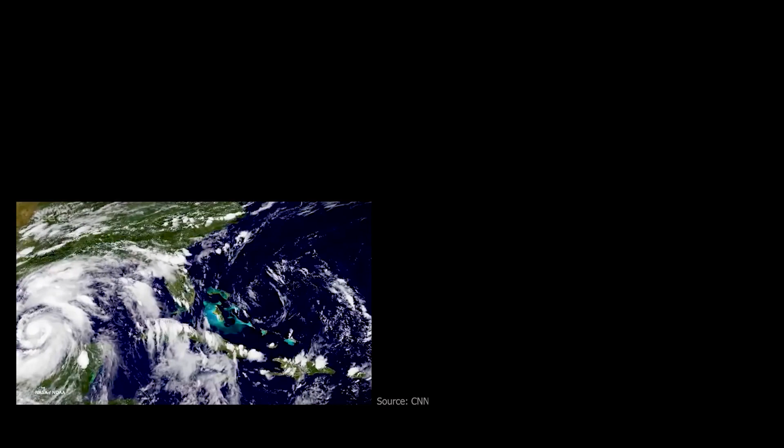Navotas has more than 200,000 residents, some of them living in danger zones. Glaciers are melting, sea levels are rising, droughts are more frequent, and extreme weather events more common.

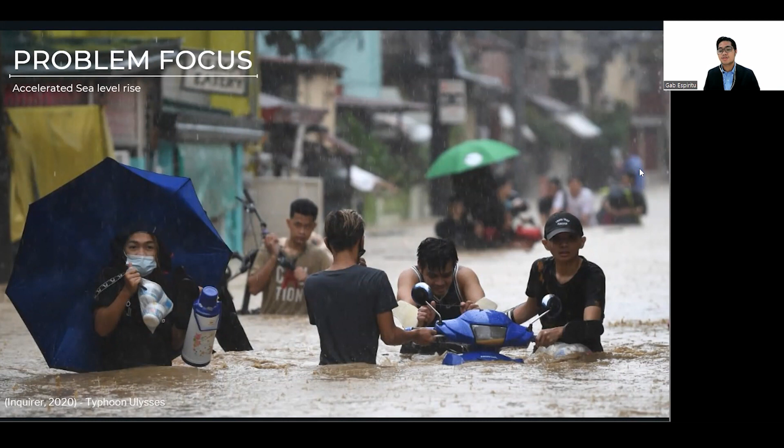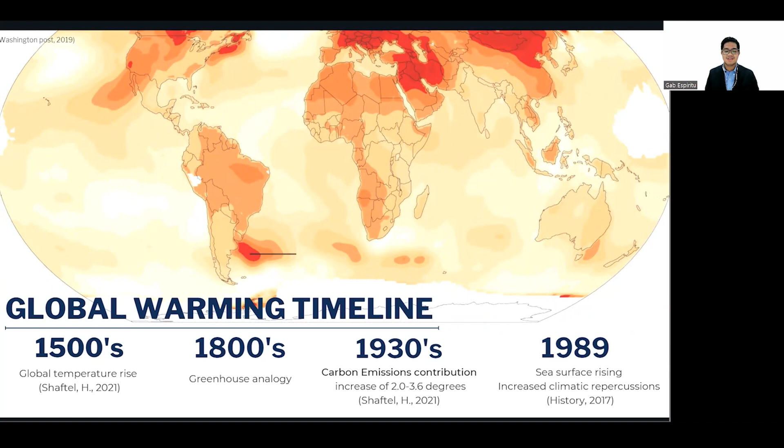Before I go into the details of the study, I want to briefly run through the background on how the current scenario of sea level rise came about. The underlying problem shows that the timeline of how global warming influenced sea level rise started way back in the year 1500s to 1989, shown in the projected emissions outlook explaining a 25 to 100 year temperature variation on a global scale.

High levels of salinity cause drastic changes to terrestrial and aquatic life. More specifically, in the Philippines alone, there's a higher percentage loss of topsoils, denuded watersheds, vulnerable croplands, and an average deforestation rate of 28%.

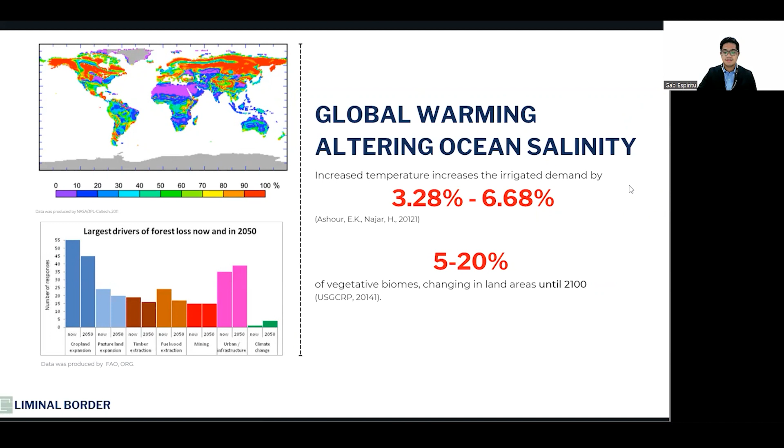Global sea level, based on RCP data analysis, where each RCP contains a unique set of socioeconomic assumptions that loops into natural systems responding to the overall warming of the global temperature. Based on the RCP scenarios presented, reflected in the graph is a factored socioeconomic representation that estimates the projection of sea level rise up until the year 2300.

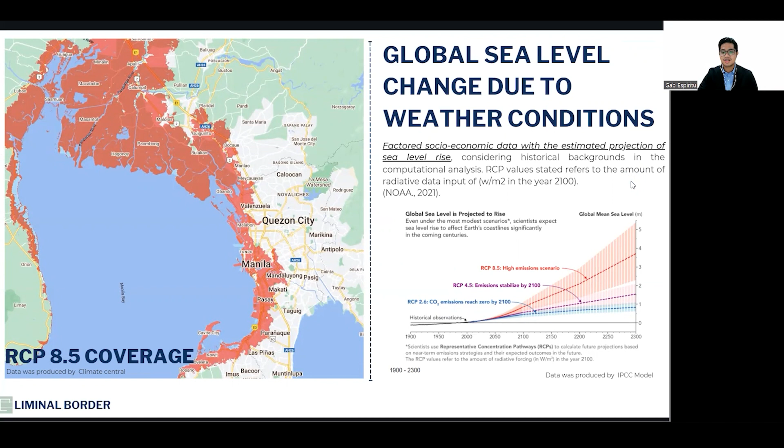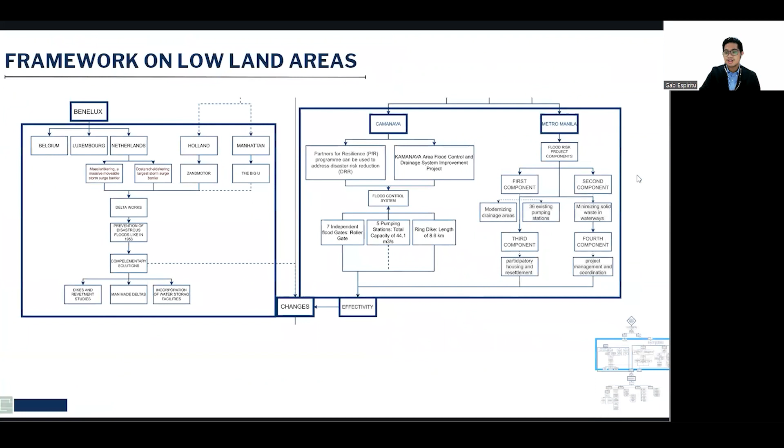The study framework of sea level rise now focuses on the global and local lowland areas. Both the global and local setting contains mitigation solutions to sea level rise. For the global scale, the study focuses more on the observation of low countries such as the Benelux, Manhattan, and Holland, which all contributed and prospered from the ongoing and developed Delta Works, setting as the main template for prevention.

As for the local setting, most of the lowland areas focus more on the logistical aspect of prevention and control systems. Indicated in the chart are some of the changes due to sea level rise in lowland areas, which heavily affected the economical, societal, environmental, and health factors.

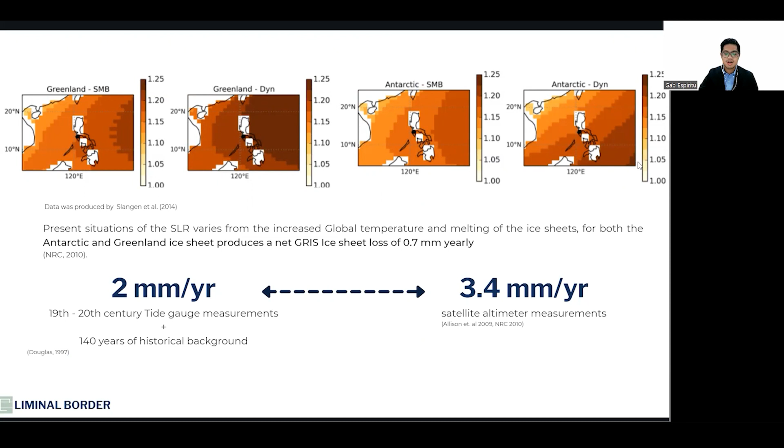Sea level change rates in an individual ocean basin deviate at an amount to the global mean, as it is affected by relative influences such as current movements, atmospheric circulation, the Earth's gravitational field, and the influences of rotation axis.

sea level rise within the area of Manila alone is rising 4 times faster than the global average rate. Considering that the Philippines is one of the most disaster-prone countries in the world that experiences flooding due to more than 20 typhoons a year, the acceleration of sea level rise will place densely populated coastal cities underwater and nearby coastal areas, which further implicates an increase of land subsidence scenarios and soil erosion issues.

With the statement of the problem, the study focuses more on the intensification of climatic influences towards the year 2050, resulting in a continuous acceleration of sea level rise, threatening lowland areas and resulting in high-risk zones. The study also tackles the potential threats of ground subsidence and its relation to the allocation of buildable areas and developing zones within the scope of the study.

As for the research questions and objectives, the first question asks what projection studies can contribute to producing resilient strategies against episodic changes in sea level rise and the prolonged effects of global warming, with the objective of integrating an environmental analysis and probability scheme to delineate the focus points where increased climatic conditions will have huge impacts. Second, what outcomes can the development of water management studies contribute to high-risk zones and vulnerable areas?

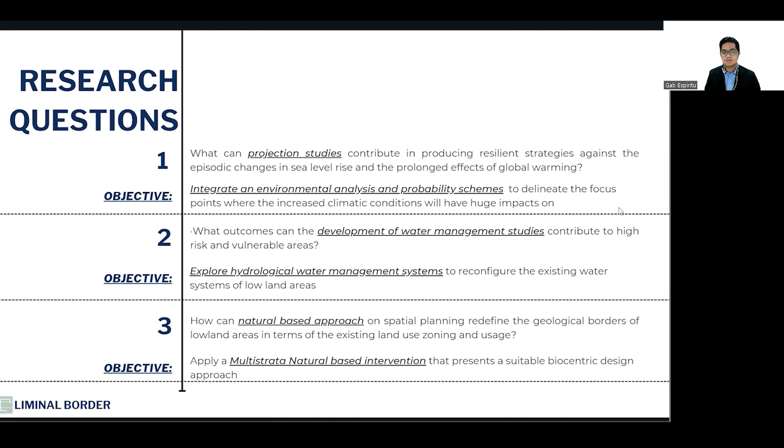Having the objective to explore hydrological water management systems to reconfigure the existing water systems of lowland areas. Lastly, how can a natural-based approach on spatial planning redefine the geological borders of lowland areas in terms of existing land use zoning and usage, with the objective of applying a multi-strata natural-based intervention that presents a suitable biocentric design approach. As for the research goal, it covers achieving an adaptive context of spatial programming that promotes resiliency in programming, increases public accessibility, creates a forefront of tourism magnet, re-engages the ecosystem outlook, and builds a communal space.

To connect the liminal understanding of the problem and the time-based design intervention, let's delve into the application of the liminal theory and its complementing design analogies. According to Patrick Troy Zimmerman, liminality is a transitional threshold between two fixed states in a cultural rite of passage for dissimilar spaces in the architecture paradigm.

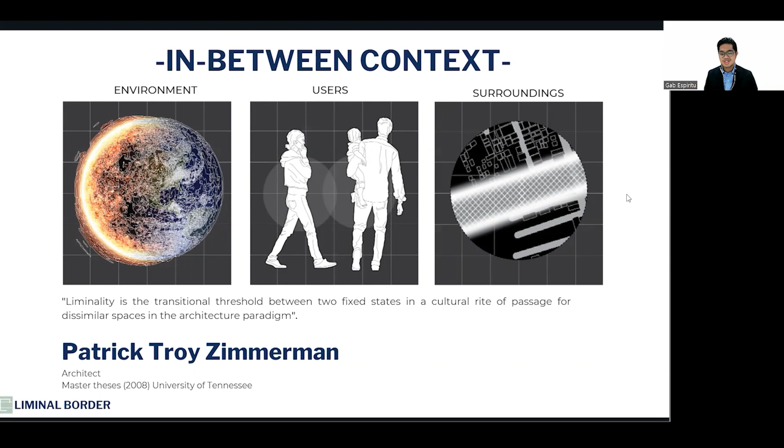In simplest terms, the theory of liminality can be understood as the in-between context. It can be situated in an environmental setting, user-face setting, or within the surroundings of the built environment. The liminal approach challenges current norms and situates the in-between context of it, which relates to several influences of time as a linear pathway. This involves the prolonging and worsening status of sea level rise, mainly due to increased global warming scenarios. Now, how can this in-between context deviate from existing solution materials and tackle a new approach?

Liminality presents preliminal, liminal, and post-liminal phases, where each phase conducts a different modulation of activities. Under the preliminal phase, it is focused more on the idea of separation from what the current norm is. In simplest context, it is to start or instigate an act.

For the liminal state, it reconstitutes the act taken in the previous state, which creates a transitional medium going towards the post-liminal phase, where it showcases a consequential paradigm of the preliminal and liminal, acting as a foundational platform towards incorporation.

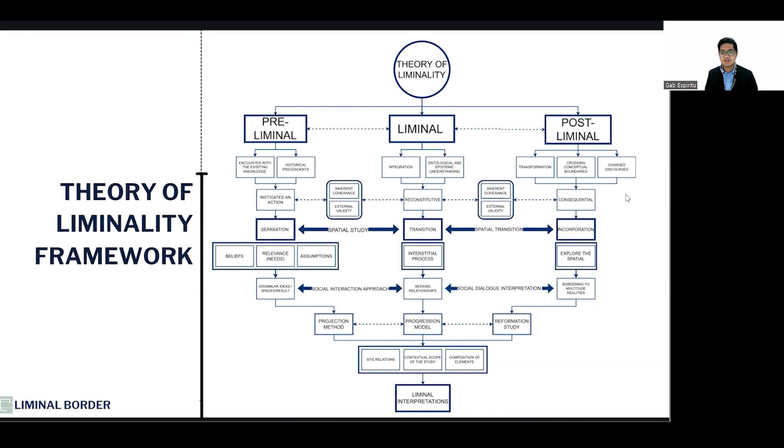This model covers the spatial and contextual aim of the study, where it redefines itself as projection, progression, and reformation. Tier liminality poses a speculative approach where it stimulates a user and observer differentiation. For the user threshold, it aligns with liminal expressions of spatial and contextual reasoning, while the observer threshold connects the biocentric approach towards the built environment as a new cognitive way of understanding.

To concretize the process of liminality, polyvalent adaptation situates a design analogy that is based on a time-based development, considering various implications and reasoning for adaptation that ultimately culminates with the focus of language, logistical, contextual, and program allocation.

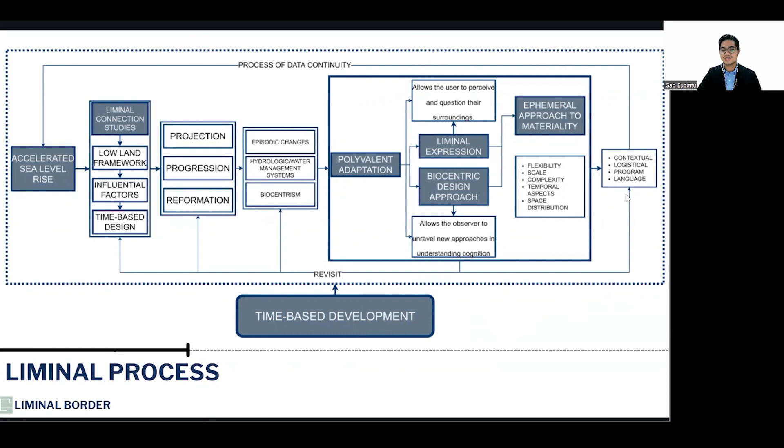The theoretical framework relays the scope of the study considerations regarding low-lying areas, which pans out to the theory of liminality of projection, progression, and reformation. Each threshold connects with the proposed liminal outcomes.

For the study of episodic sea level rise, it highlights projection aspects that are achieved through probability schemes and risk assessment methods, which consider percentage predictions and pathway scenarios.

Next, we have the macro and micro water hydrology process for progression, which focuses more on the process of containment and delivers the adaptation of existing systems to produce efficient collaboration between program and solution.

Lastly, the biocentrism ideation focuses more on the reformation idea that tackles agroforestry studies and natural-based solutions, which ultimately questions the meaning of the built environment and its purposes. The three outcomes end with the intent to create proper space programming analysis, a dynamic contextual outlook, and a multi-strata natural-based intervention. For the first part of the conceptual framework, it shows the formulation of the theory of liminality in accordance with the outcomes of preliminal, liminal, and post-liminal.

This correlates with the narrative of the lowland systemical and programmatic approach to sea level rise by interpreting the preliminal phase, liminal phase, and the post-liminal phase as a single and direct entity of the design process.

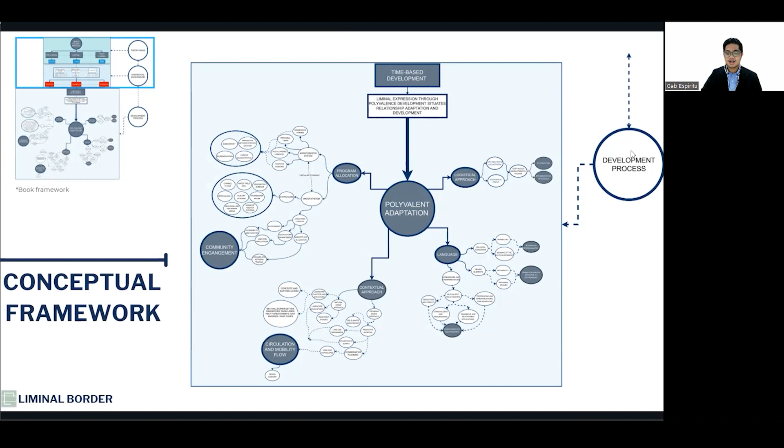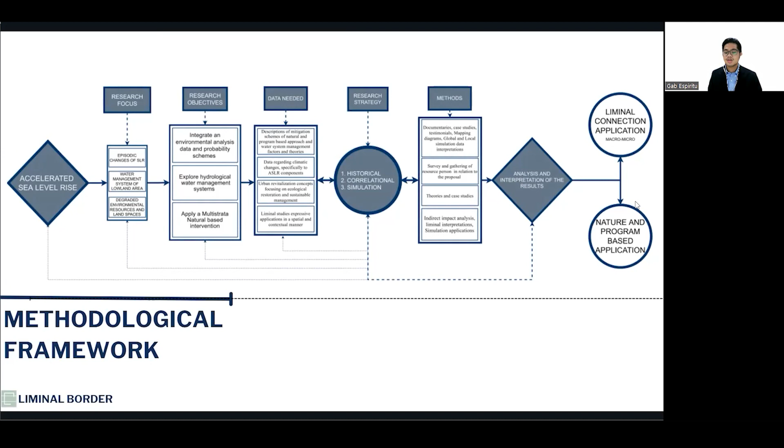For the methodological framework, it shows the process of data allocation going towards proper research strategies of historical, correlational, and simulation methods. It then follows the delivery methods, concluding with the analysis and interpretation for the architectural intervention.

For the case studies, first we have the New Meadowlands located at New Jersey, which focuses more on integrating a spine-like foundational system for transport and protection from future storm surges.

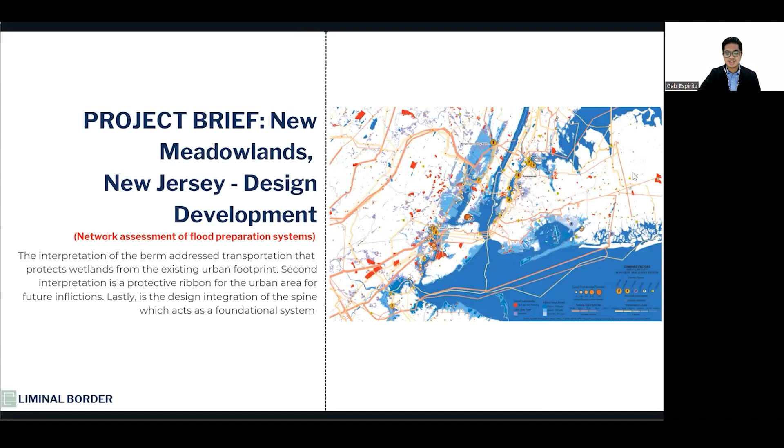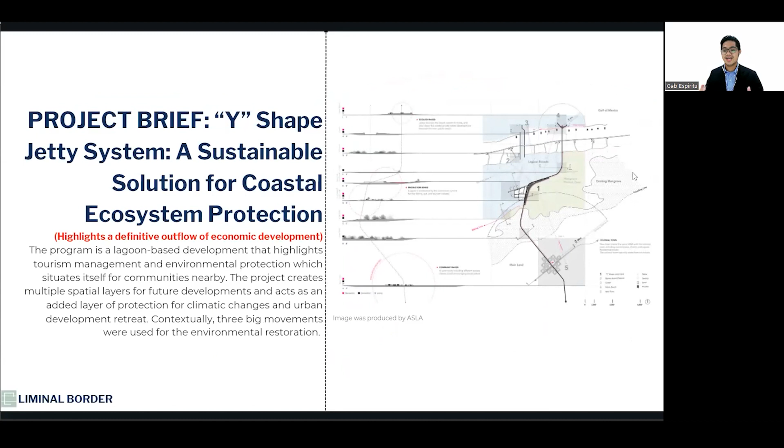The Y-shaped jetty system focuses on coastal ecosystem protection, where it creates multiple spatial layers for future climatic changes.

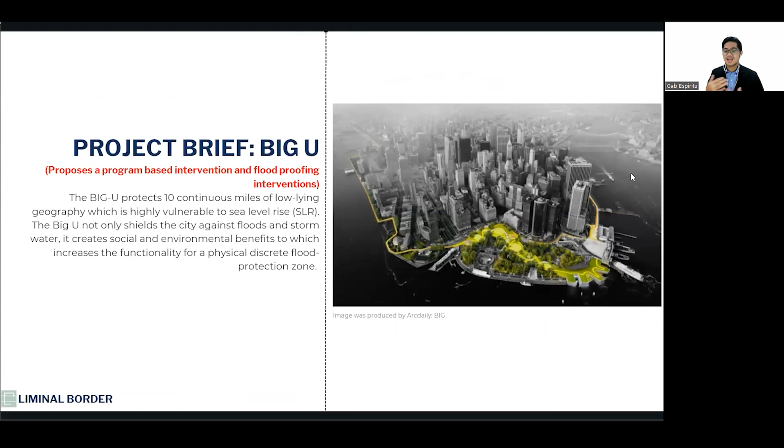Big U by Bjarke Ingels spans into different layers within the coastal area that protects the city from floods and storm water. LPPCHEA, a wetland center complex, focuses on preservation and conservation of mangroves, which also acts as a venue for an educational center.

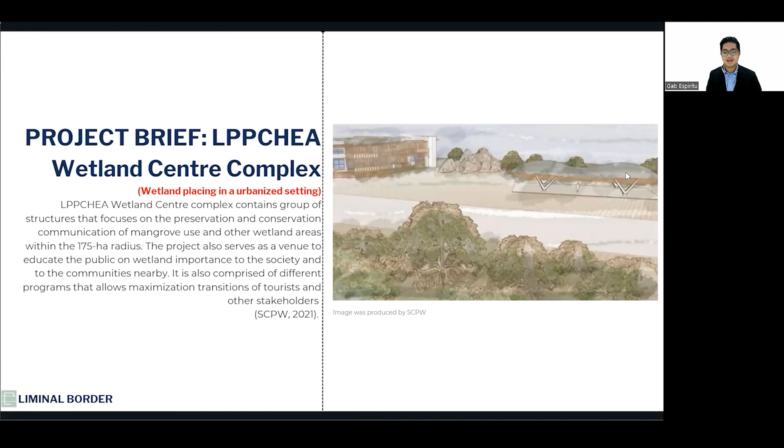Lastly, the amphibious boulevard pavilions react to an emergent type of habitation along the riverbank that blends itself into the surrounding environment.

For the dialectics, the thesis explains that sea level rise places lowland areas as a benchmark for liminal ideation in developing polyvalent adaptive scenarios for resiliency development.

For the antithesis, it poses that intensification of climate anomalies induces drastic change and will negate adaptation techniques.

For the synthesis, it entails a yearly projection of sea level rise that proactively uses a biocentric design approach of liminal expression through polyvalent adaptation techniques in lowland areas.

For the thesis statement, the climate-threatening outcomes of accelerated sea level rise posit that liminal expression as a design approach through polyvalent strategies of adaptation, covering a biocentric outlook of typological development, hydrological background study, and water management systems, results in a viable environment that generates a circular economic lifestyle.

For the scope of the study, it heavily focuses on climate outcomes up until the year 2050, before the worsening status of global warming and its effect on sea level rise. As for the limitation, most of the data projection and analysis is also limited only to the lowland borders of the CaMaNaVa area.

For the study proper, a major contributor to the fishing livelihood was the 23 fishing ports of the CaMaNaVa region, where it produced thousands of jobs and food security.

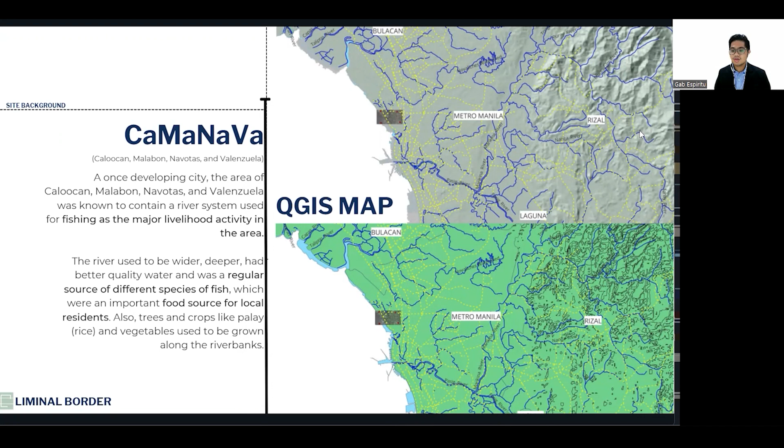This city is known to be a capital of market centers and other centennial parks located within the nodes of each region. The graphic is taken from QGIS, as 4 points were taken for georeferencing with a 50-meter interval for the contour shown. The graphic also shows the road, waterway, and coastal lines of the macro map of the site.

CaMaNaVa region is situated between the estuary and river deltas, which is one of the most densely populated coastal cities. The area is under a lowland plateau, which makes it prone to flooding scenarios that eventually weakened the soil stability of the CaMaNaVa region.

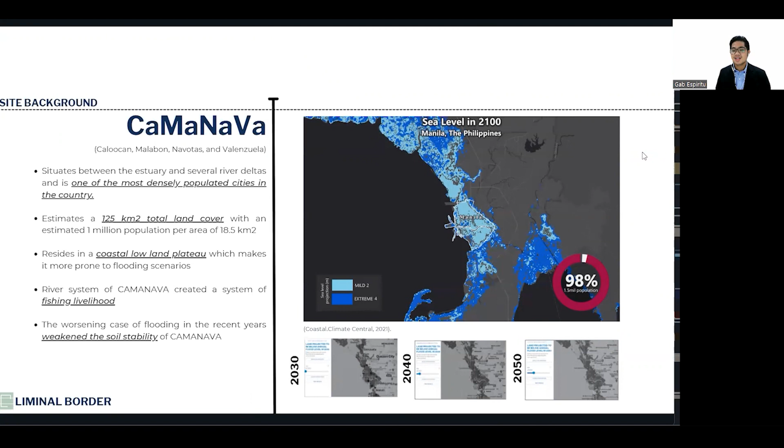For the representation of the macro map, I use the tool of EPW script to attain the base map, relative humidity, sun path, global radiation map, and waterway map.

The proposed area of intervention focuses on the border side of Navotas facing Manila Bay, strip border areas of Caloocan and Malabon that situate the intersection of Tullahan and Navotas River. The site measures an estimated 180,772.562 square meters.

Reflecting the updated comprehensive land use plan of Navotas, Caloocan, Malabon, and Valenzuela, the zoning mapping indicates how most of the area covered within the proposed site consists of residential areas and few commercial spaces, and how the zones sprawled out way beyond the regional planning of the city ordinance that eventually caused an increase of sea level rise effects due to ground subsidence.

Alongside the zoning study, here are some other pertinent mapping data relevant to the sea level rise phenomena: a topographic map indicating the variation of elevation between the cities of Lower Caloocan, Malabon, and Navotas, and a liquefaction map showing the potentials of high and medium risk of soil weakening.

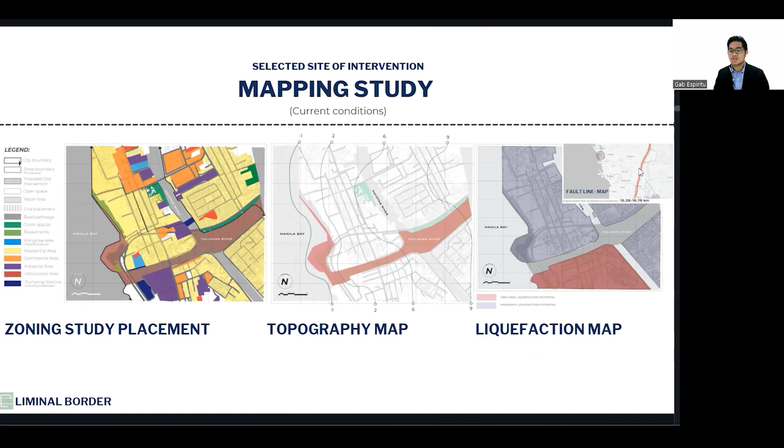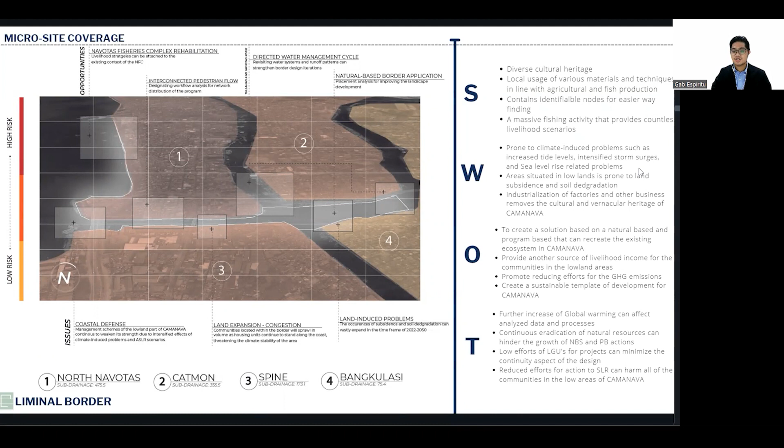The initial SWOT analysis shows the division of the four areas based on the sub-drainage of North Navotas, Catmon, Spine, and Bangkulasi. It covers high risk and low risk areas between the border, which eventually created guidelines and observations towards the intervention proper.

For the design process, the direction of the design study follows through the process of projection, progression, and reformation, as a key variable to the process of liminality through polyvalence.

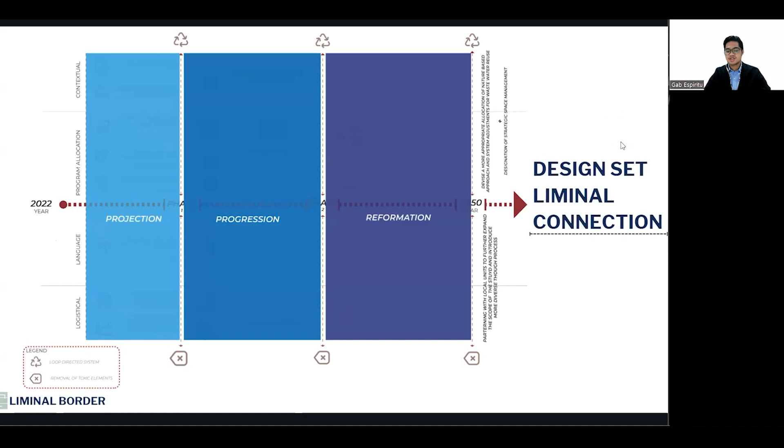The design narrative focuses on how the liminal state of projection, progression, and reformation creates a singular and continuous project-based development. The polyvalent adaptation highlights the division of projection, progression, and reformation strategies from 2022 to 2050.

Each section of the contextual, program allocation, language, and logistical approach varies on the loop-directed system that allows a repetitive information distribution from the users, observers, stakeholders, and other personas involved.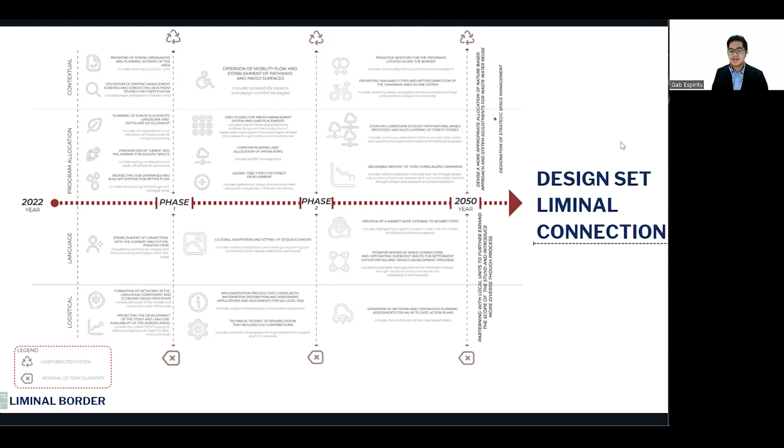It also uses the removal of elements to allow a filtering medium in recreating the contextual studies of the design.

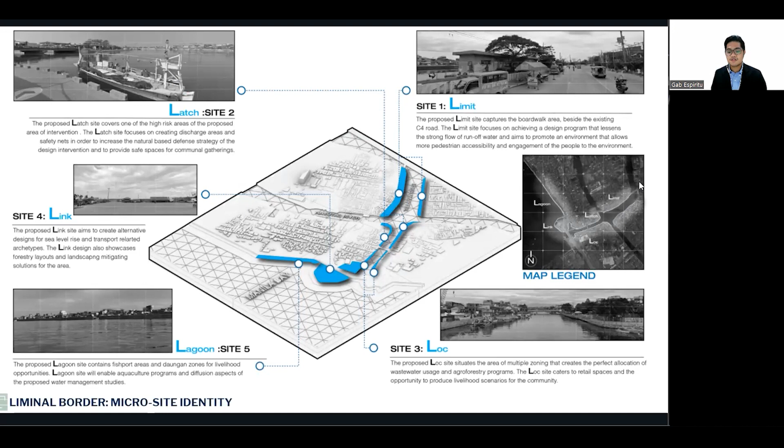To give emphasis on the distribution of sites in the proposed area of intervention, as the outline of the area insinuates, the areas are given identities: limit for Site 1, latch for Site 2, loc for Site 3, link for Site 4, and lagoon for Site 5, showing that the name placements give a hint of their purpose, function, and contribution to the design development.

Aligning with the liminal connection of user to the built environment, the proposed area of intervention is divided into 5 design sets containing different liminal connection properties based on their individual liminal conditions, pertaining to both the existing environmental context, boundaries, and the existing activities it holds.

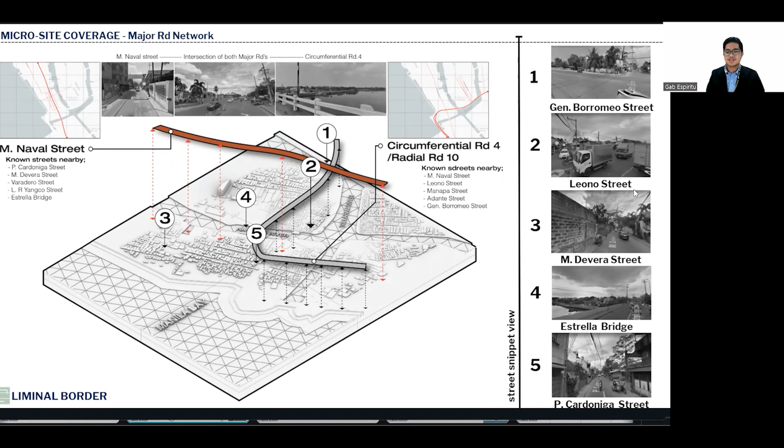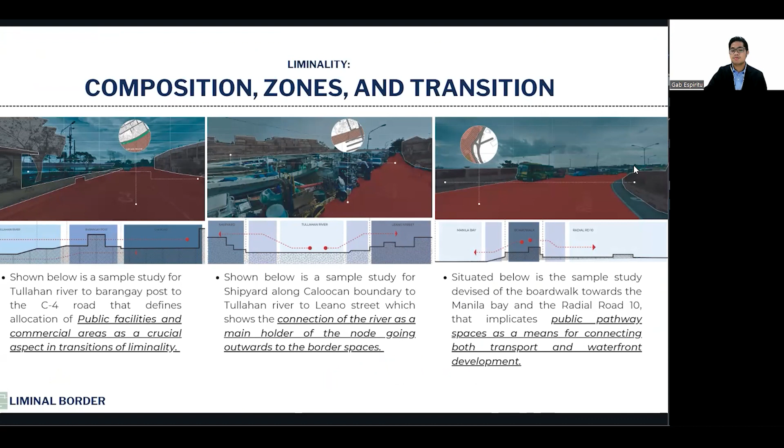The factor of liminality then crosses the compositions, zones, and transitionary elements, which is identified for each site within the proposed area. The liminal design sets go into the speculative process of branching a user-driven design, where the basic principles...

...of elevation for lower and higher risk of flooding areas, merging the duality of the programs that the site contains, and lastly, attachment in enhancing the strengths of the existing site.

The design principles consider the specific conditions of the site as shown in the programming below. The study allows the previous liminal states to be applied into the site and to the parameter it holds.

For each design set, the establishment of a liminal threshold between the users and the built environmental study situates sample scenarios where it covers void spaces as visual connection, visual blocking of wall enclosures, minimal blocking of connection choices, and minimal blocking of a fixed choice.

Next set, we have liminal connection as a moving persona, elevated spaces as visual enclosures, elevated spaces as visual opportunities, and elevated spaces as clusters.

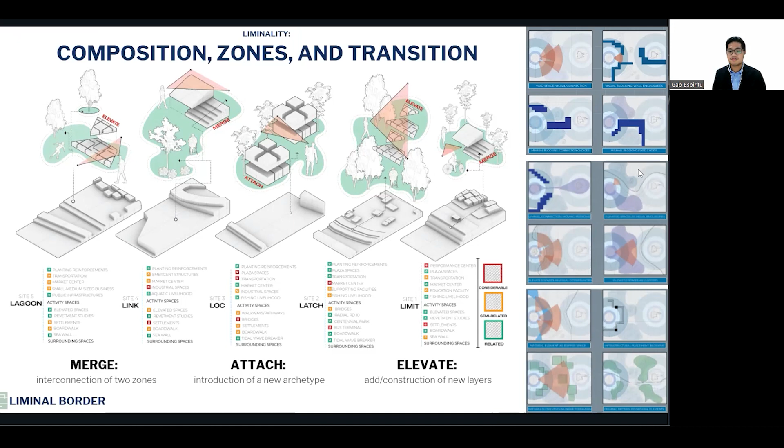For the last liminal connection study, it contains natural elements as buffer space, infrastructural placement blocking, natural elements in a linear formation, and organic pattern of natural elements.

The liminal ideation is not limited only to the site conditions, but to multiple disciplines as well. These are transport, aquatic programs, commercial, and residential areas, where in this study, the design analogy focuses on the contribution of the liminal border and its influence onto the stated archetypes.

With the development studies conducted onto the liminal border, this design phase heavily enforces the process of border connection, its coverage input, the process of overlaying, and water flow adjustments, as it is a vital markup leading to...

...the simulation of a growth channel study indicating several node points created along the corners of the border site, which intends to create and form organic channels which fulfill the water flow objectives.

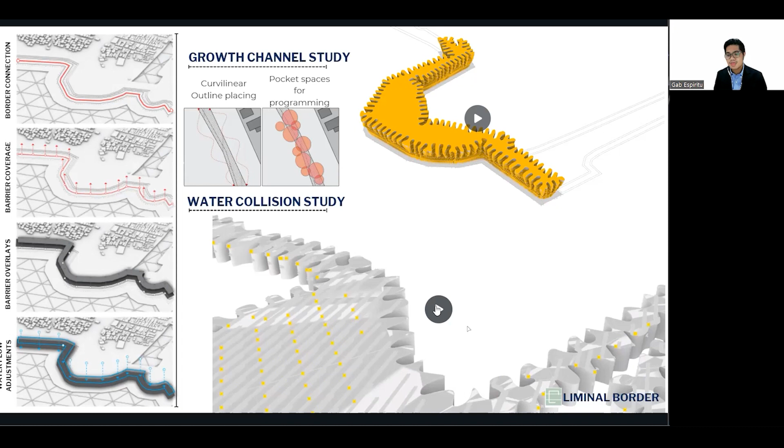The growth channel study is then adjusted for a water collision study in preparation for multiple scenarios of pluvial flooding, flash floods, and coastal flooding.

Positioning the proposed site of intervention based on the given 5 design sets, the variation of each site correlates specific use towards the general layout and uses. It is divided into the channeling and redirection of phase 1...

...utilization and harvestation for phase 2, and diffusion and usage for the last phase.

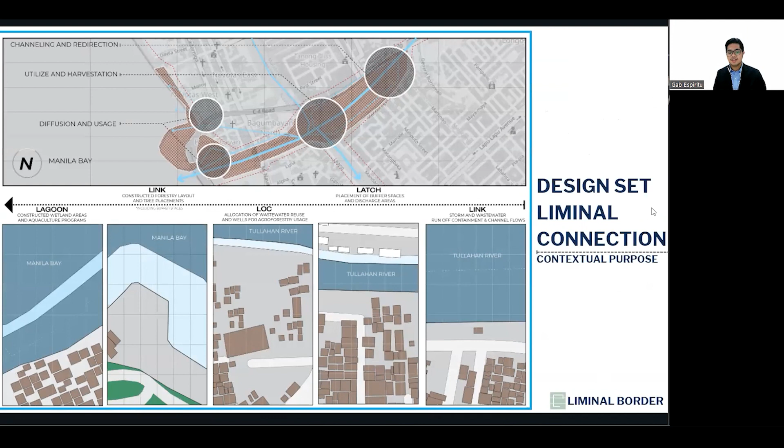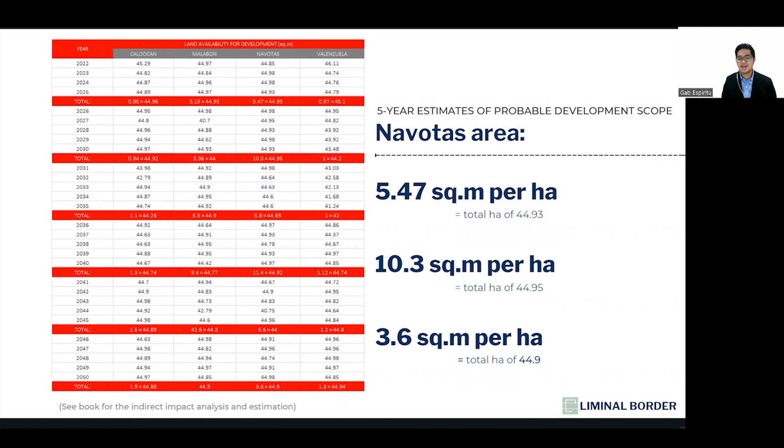For the border design schematics, the study allocates the usage of an indirect impact analysis computation and land use availability to estimate a square meter per hectare allotment for each developing scope of the study. This promotes the use of the Navotas measurements as the baseline level since it is the most vulnerable area within the CAMANAVA region.

Using the 5.47 square meter per hectare as a basis for the border iteration, the initial scheme explores divisions of land and water channels across several known shapes. The repetitive allocation of base shape, cross pattern, linear pattern, crisscross pattern, wedge side pattern, tapered pattern, contour pattern, and central fluid pattern is applied into 7 shape schemes.

For the 10.3 square meter per hectare, this stimulates the study of program placement schemes where it tackles on the application of base shape, frame module, base frame pattern, center platform, catch basin form, terraformation, contoured pattern, raceway form, cross bracing form, semi-cross bracing form towards both the iteration models.

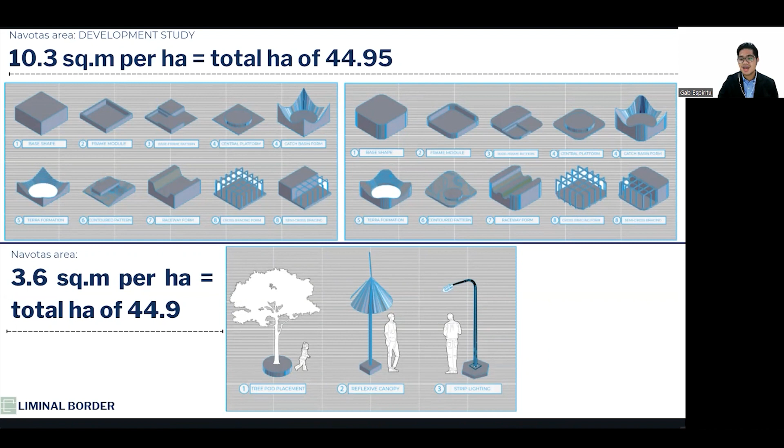For the 3.6 square meter per hectare, it focuses on the placement of covering utility measures, which is divided into tree pod placement, reflexive canopies, and strip lighting.

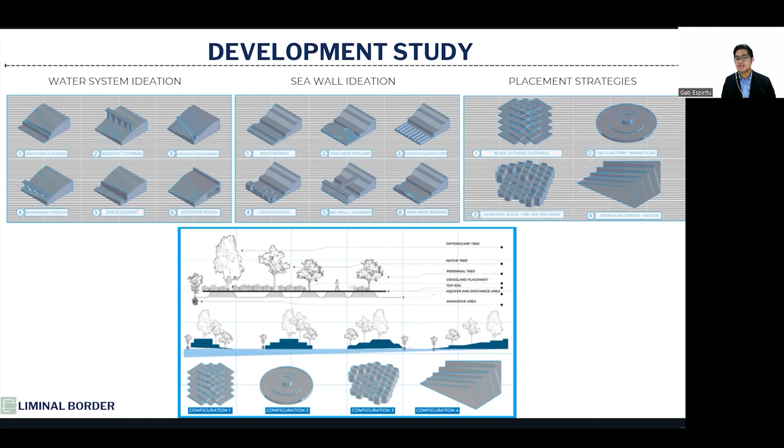The following developmental schemes show the water system ideation process, seawall ideation, and the development of the placement strategies shown earlier. This development study tackles on the initial placement strategies of 4 types and the topographical compositions, which is based from the configuration sets below.

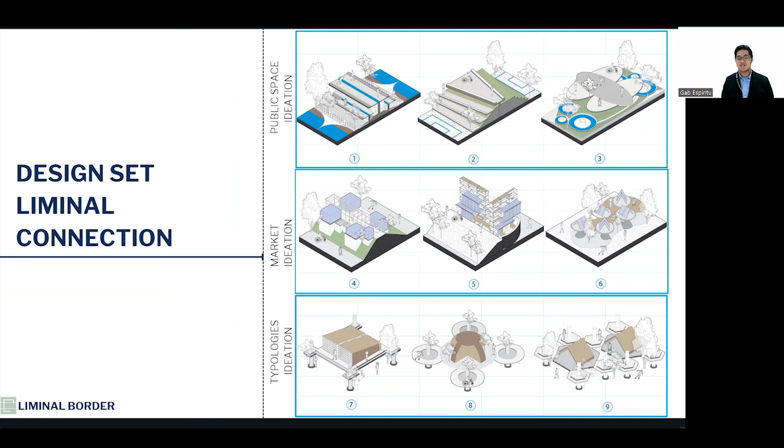The following scheme compositions mark the allotment of the projected inputs and translate them into the design aspect, where the first 3 show alternative border layouts. As for the second set, it consists of typologies that promote the use of frames and modular fabrications. And lastly, the last set shows iterations for the emergent structures of the development.

The master plan pushes for renewable and durable material specifications and sustainable design efforts towards re-engaging the nearby community to the enhanced liminal border design.

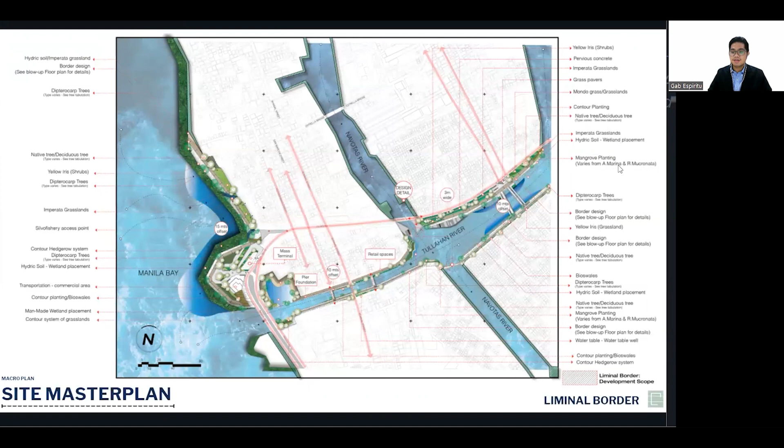For the micro use of each site, the specific lot area coverage is shown and the total area combined of all the 5 sites allots to 58,783.09 square meters. The microsite development plans also show the placement of structural foundational systems, proposed mobility pathways, commercial and retail typologies, and natural-based specifications pertaining to sea level rise, such as man-made wetlands, marshes, boardwalk conduits, soil placing, and more.

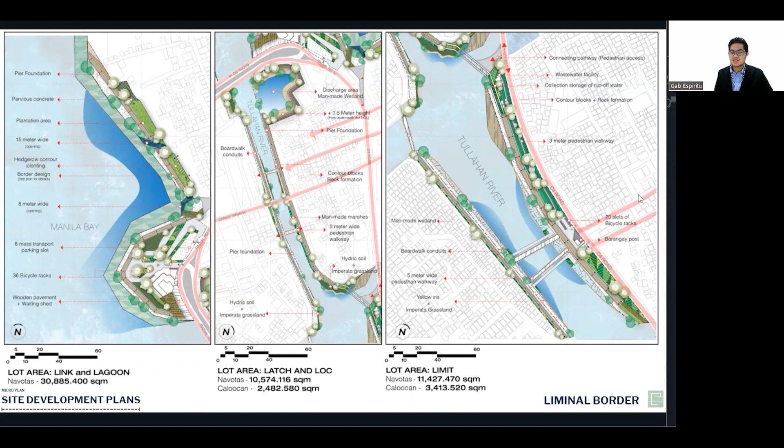Focusing on the nature and program-based narrative, the proposed design also gives a brief rundown on how the materiality and displacement of resources would be allocated for livelihood and energy purposes.

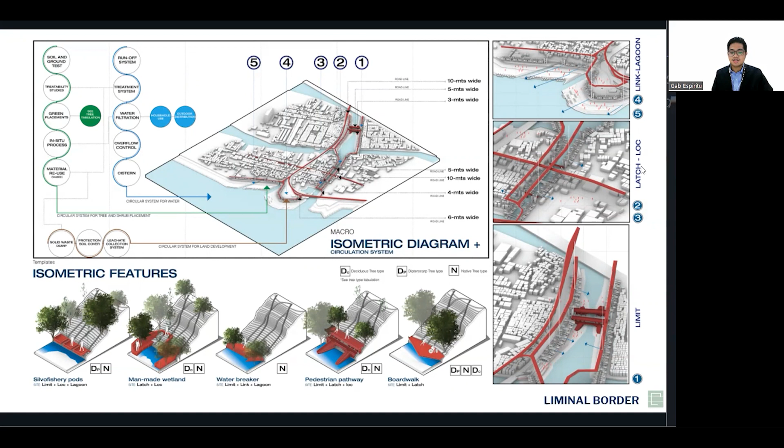The graphic explains that the multistrata connections is not limited only to the design analogy, but also to the overall context of the program, where it gives connection for pedestrians and dual opportunities for the locals, which is highlighted on the supporting design collaterals below.

Further, the proposed circulation for movement and mobility gives the ability for the end users to have options in moving from one city to another, as what the liminal theory suggests, situating the border and using its developing construct as to connect people from different cities.

Now, to tackle more on the specifics of the border design, zeroing to the multistrata border design, the proposed layout shows multiple growth channel connections, paving for water filtration, storage, and redirection for the border scheme alone.

The detailing also shows the elevations of each channel, where the assumptions generate that water is free flowing. And the purpose of having the growth channel design on multiple levels is to increase the success rate of a better hydrological management within the parameters of the border.

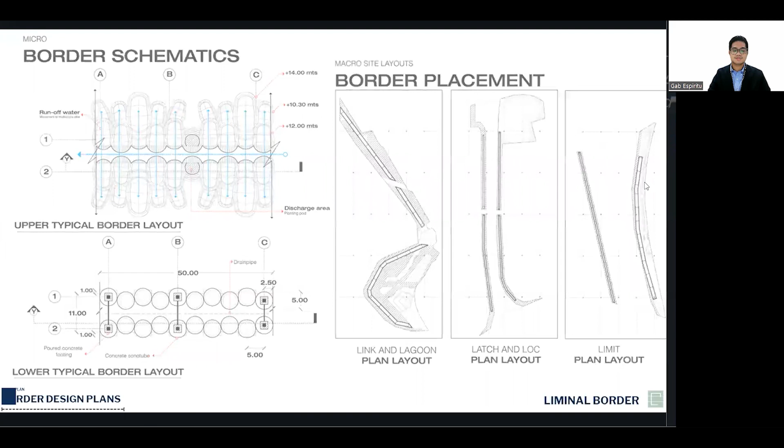The border design also uses a pier foundation, which is commonly used for waterfront areas and riverbank structural specifications. As to give a more detailed take to the border material specification and use, shown in the graphic, the blue lines pertain to the fluvial and coastal interventions of the water management.

The graphic also shows how users can navigate through the design and how it promotes multiple usage of its design function, design elements, and allocation of materials.

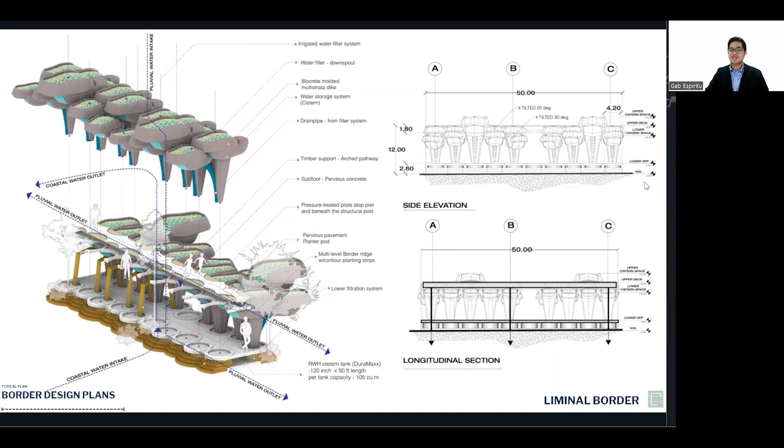Focusing on the ephemeral structures of the design, the retail spaces of the proposal showcase the liminal interpretation of levels and view ranges, where it allows basic construction process for the common and to create configurations that are easy to develop into commercial strategies for the community.

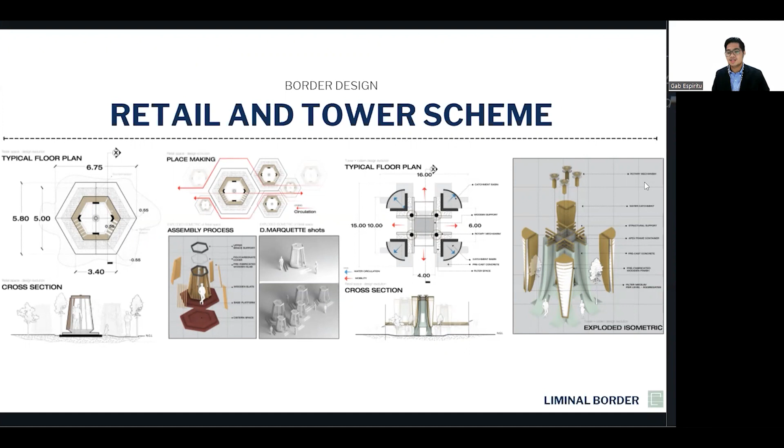The design also caters as a threshold space, giving a separating identity from the old border design of CAMANAVA, showcasing its simplicity and non-destructive forms. The intricate placemaking of the structures onto the border entails a concept of permanence, where users of the proposal will experience liminal transitions from levels, open spaces, visual ranges, and mobility.

The idea of the design is to maximize the limited space of the border and recreate the communal aspiration of a city, allowing users to navigate themselves onto the design as every program is aligned and connected to the actual planning of the proposal.

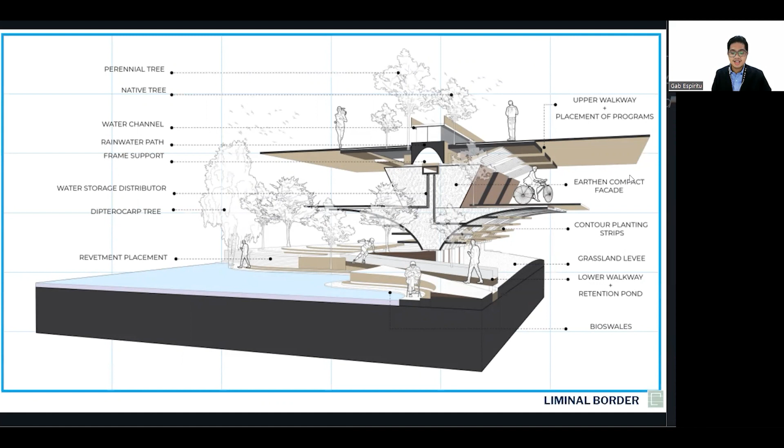Situating the scheme for the border iteration, the graphic shows a sectional perspective of the layers and elements under the composition of a typical lowland border area. Indicated are the systems and strategies applied into the context of the proposal.

Focusing on the lower walkway portion, the sectional perspective shows a much clearer composition of design and technical elements devised in the lower site selections.

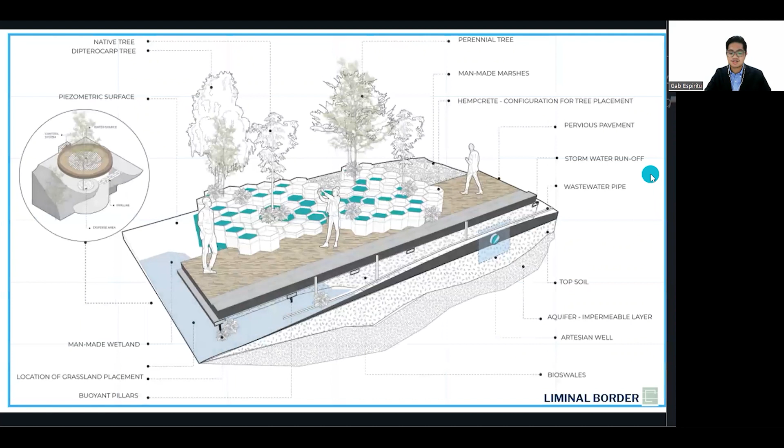Moving on, the proposal also introduces a small-scale mass transport infrastructure that will accommodate all the transportation and facility management of the proposal. It is designed to set a walkable and open type space within the perimeter of the link site, connecting all the border design of the proposed area of intervention.

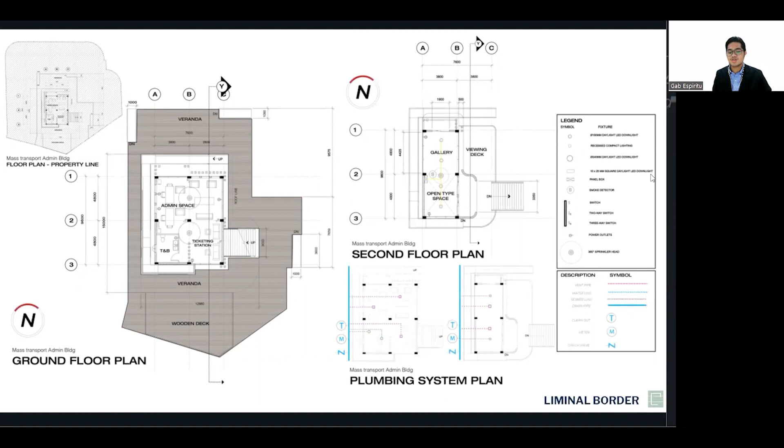The plan of the transport management oriented infrastructure entails basic space programming of ticketing stations and admin office for mass transportation mediums, and for both transport and livelihood channels of the proposal. It also shows the proposed plumbing and utility layout of the design.

The graphic shows the elevations and sections of the proposal, highlighting the division of spaces and how it resembles a split type design, allowing for a walkable upper floor for pedestrians and PWDs.

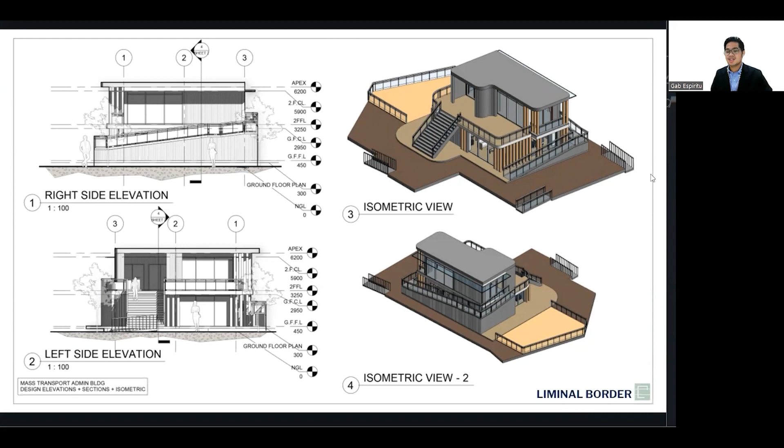Further, another sheet shows elevations and isometrics of the proposal, highlighting some of the vernacular materials of wooden slats and concrete finishes to show the sturdiness of the design to contradict harsh conditions of the constant tide and sea level intrusions.

Keeping in mind the border design systems, shown is a bay section detail and how the basic construction of the border would come about, as it highlights the foundation specifications and material selections of the areas involved.

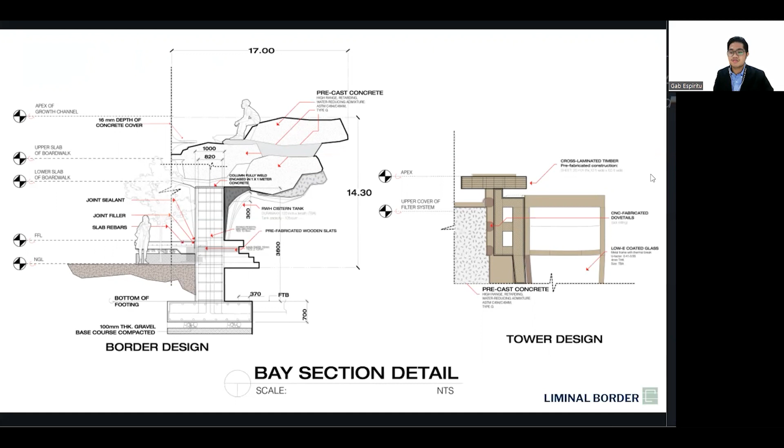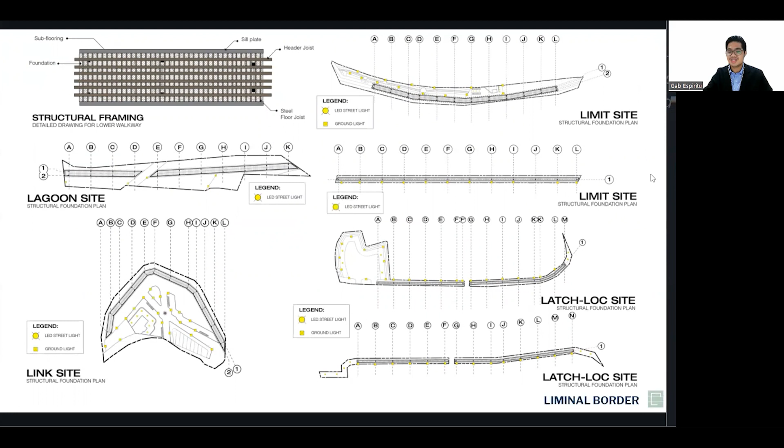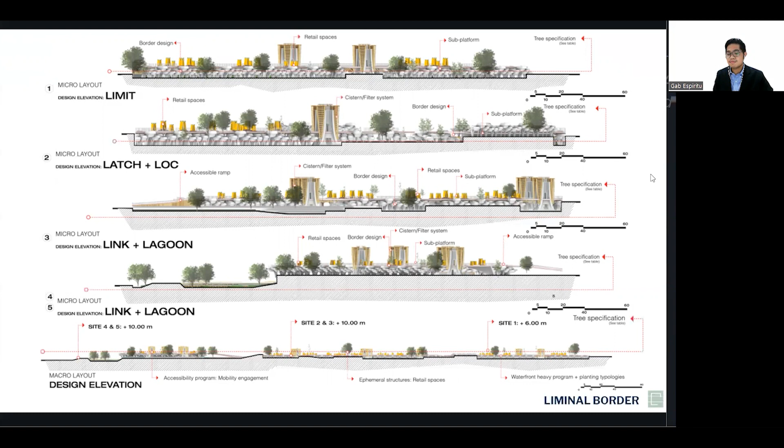With the detailed composition of the border, the analogy shifts onto the macro application where it is situated and adjusted based on the space programming and typological usage. It is very evident that the commonality of the design is based on strengthening the border's capability to handle and adapt intense water flow intake.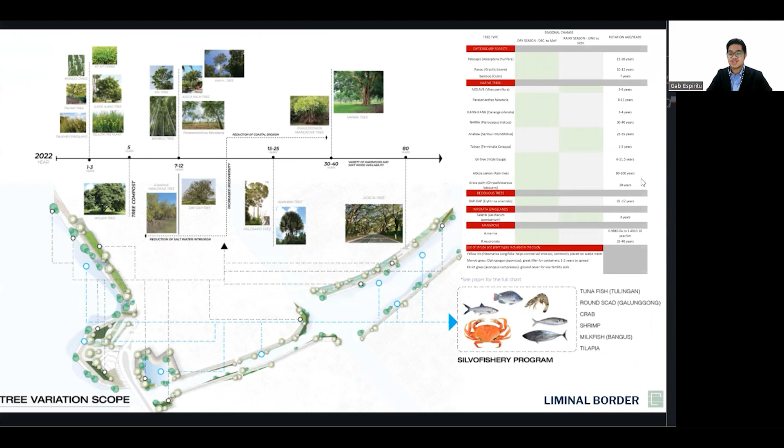The next graphic shows a detailed time frame based on the rotation years and some of the silvofishery components indicated in the design. Based on the coastal EDM simulation projection, each phase tackles on several uses that adapt to the various changes in level of water, which then portrays initial water management schemes.

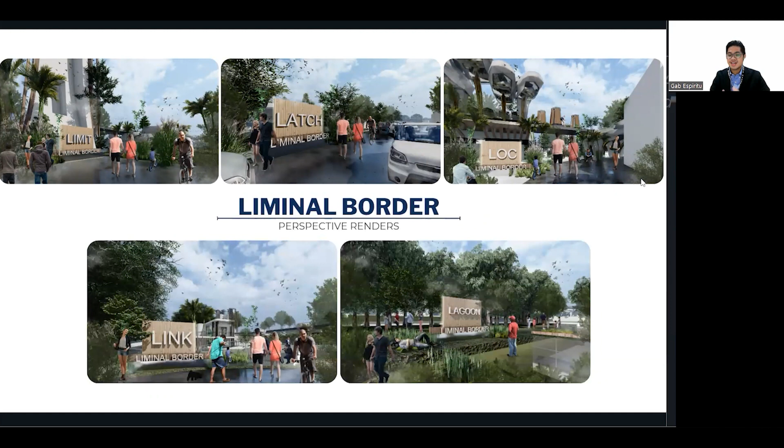Before concluding with all the given design technicalities, the liminal border will be a future template for a flood-protected, and updated management strategy design of the CAMANAVA region, creating benchmark designs for each site as it holds individual identities of protection and local integration.

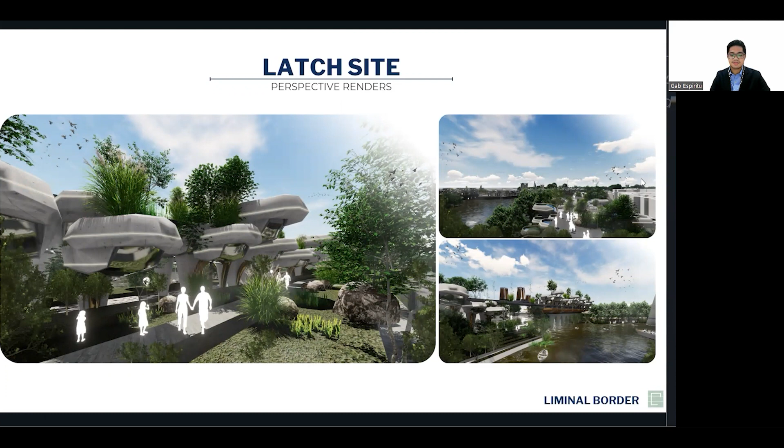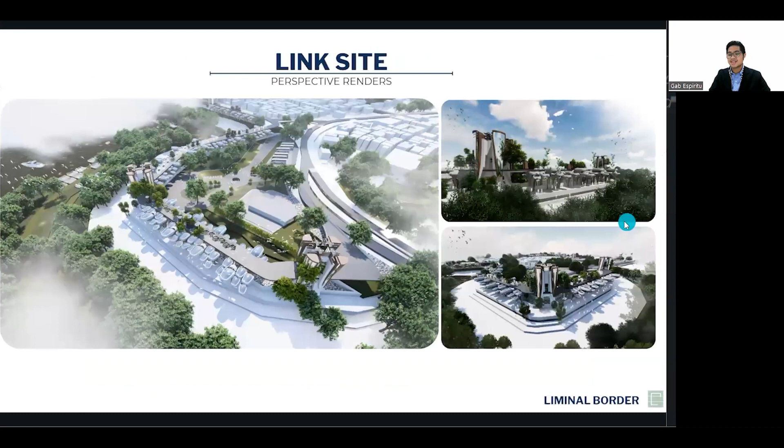For the limit site, here are some of the individual perspectives: latch site perspectives containing lower site selections and boardwalk shots; LOC site containing perspectives of the open areas and retail zones; link site containing perspective shots of the mass transport; and lastly, the enhanced lagoon site, capping the liminal border solution.

The study concludes with the importance of nature-based and program-based solutions that culminate with the appropriation of liminality towards problem solution derivation, to adaptation and mitigation schemes in liminal thresholds, translating the in-between development of borders where the model settles within as a built construct in the effort of counteracting episodic changes through the process of projection, progression, and reformation of a time-based design.